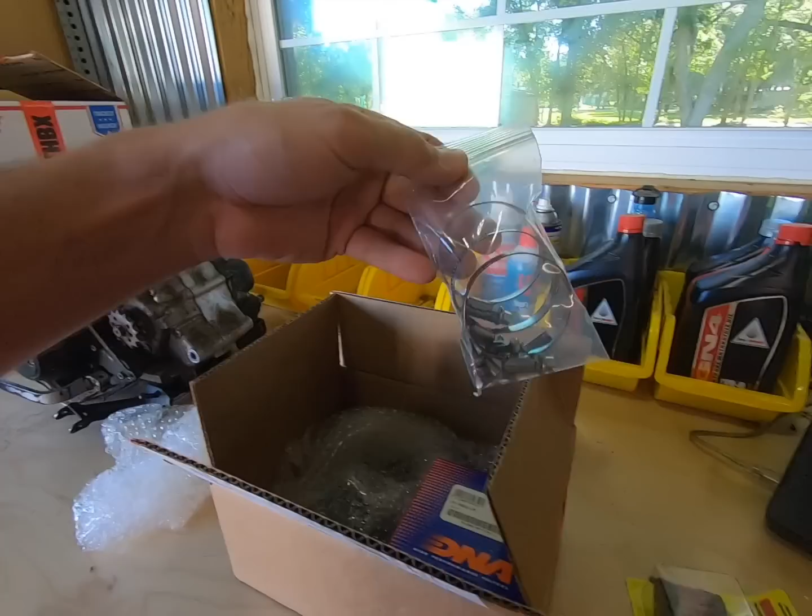It's the new intake system for the Honda Monkey. This is a pre-production piece for MNNTHBX. I know they're for sale on the website, but I don't think customers are receiving them yet, so I received this one a little bit early. I'm not going to focus too much on the unboxing because it might not be indicative of what everybody else gets, so don't focus too much on this. But as usual, nicely packaged box. We have some clamps, the breather filter, and I went with the DNA option for the filter. This is the part you'll probably see the most, but we won't focus on showing you that right now because it'll be on the bike.

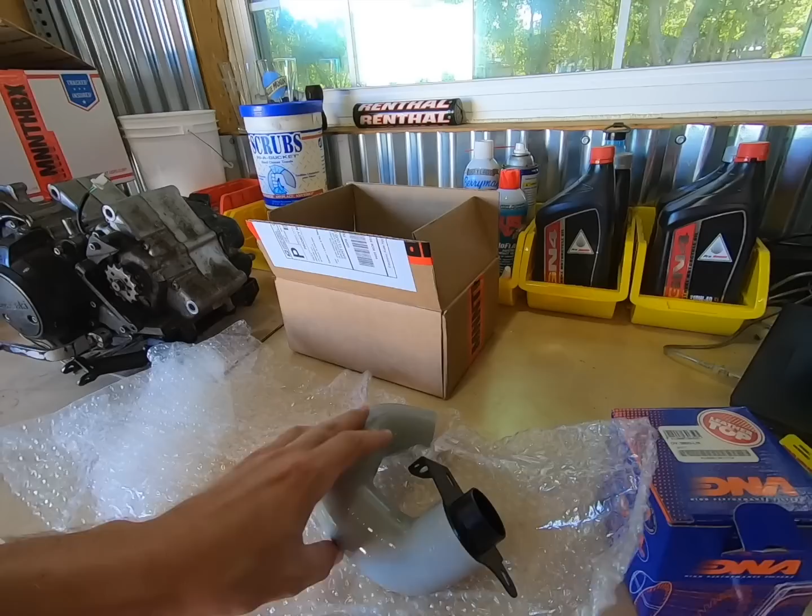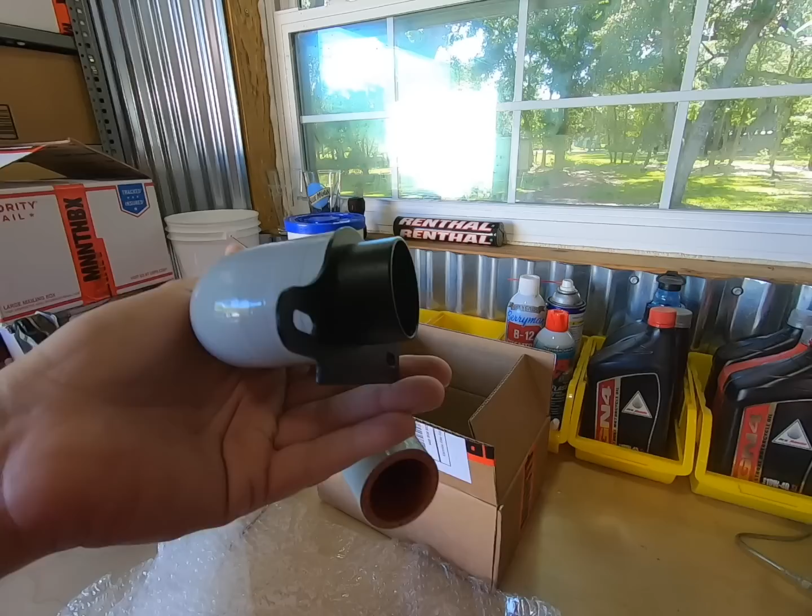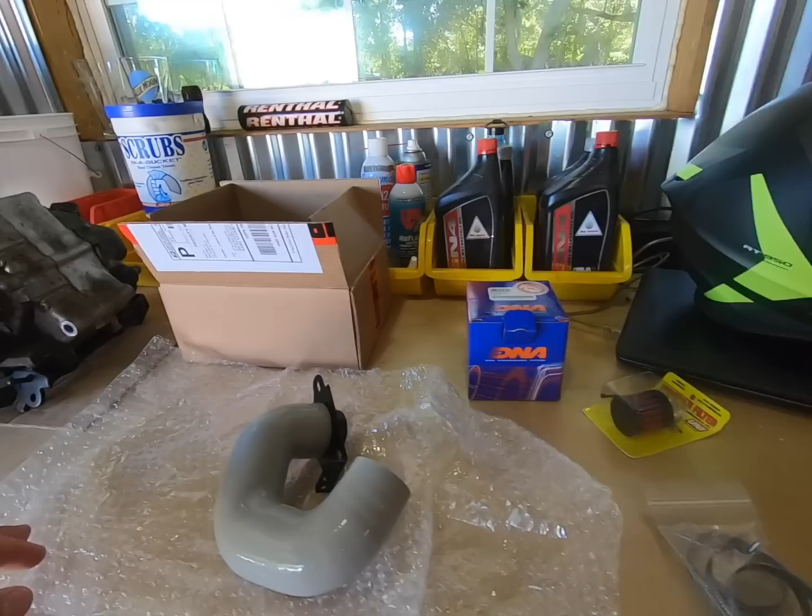And of course the actual intake itself here, which is custom made or specifically designed for the Monkey. It's a silicone intake system, looks like at least an inch and a half maybe size tube, and there's the mounting bracket already hooked into the intake, so this does not look too difficult. But I will go over the factory manual instructions on how to remove the intake just so we have the actual official method of taking that off, and hopefully that'll help you guys along the way installing your intake. So let's get to it.

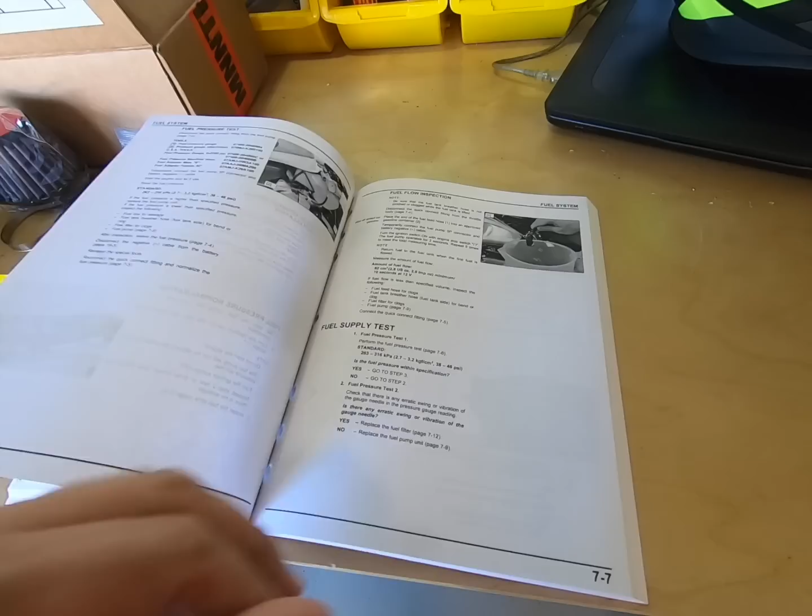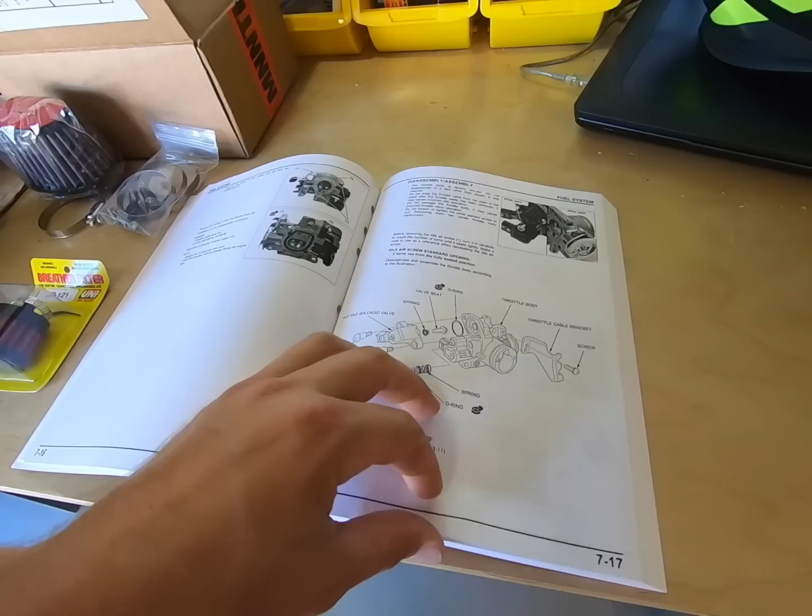So I invested in the Honda service manual for the Monkey bike. My thoughts were, I can figure stuff out, but I didn't know the torque values on a lot of things. Reading through this manual, there's a lot of info you probably wouldn't have known about. One of the things I learned with the Grom was that there's an air screw on these air intakes, and it's not a carburetor, but it kind of works like it in the throttle body. So there's some interesting little facts and stuff in here that you could definitely benefit from and at least feel more comfortable about when working on your bike.

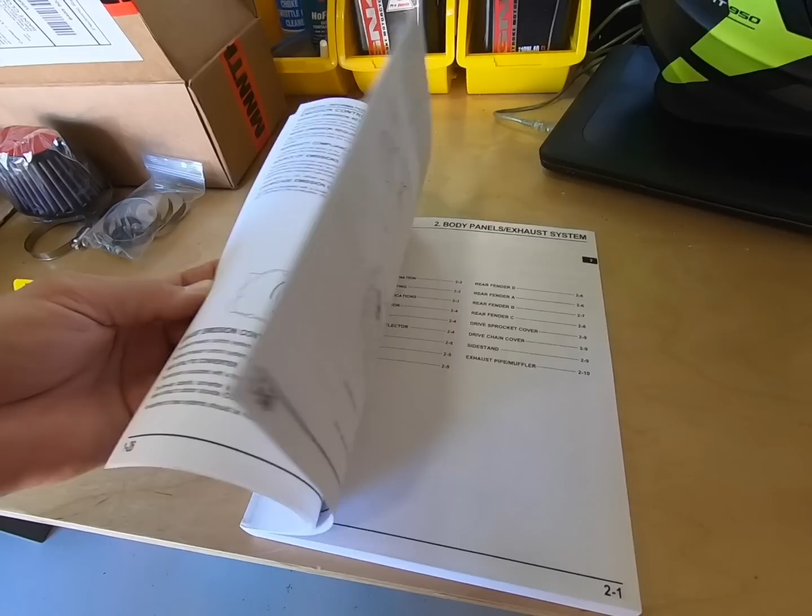So I invested in this, and what I'll be doing, hopefully it helps out, is going through what the factory says you should do as far as these processes. Whether I do it that way or find an easier way, we'll just go about it when we get to that. So the first step in this process is the air cleaner housing removal and installation.

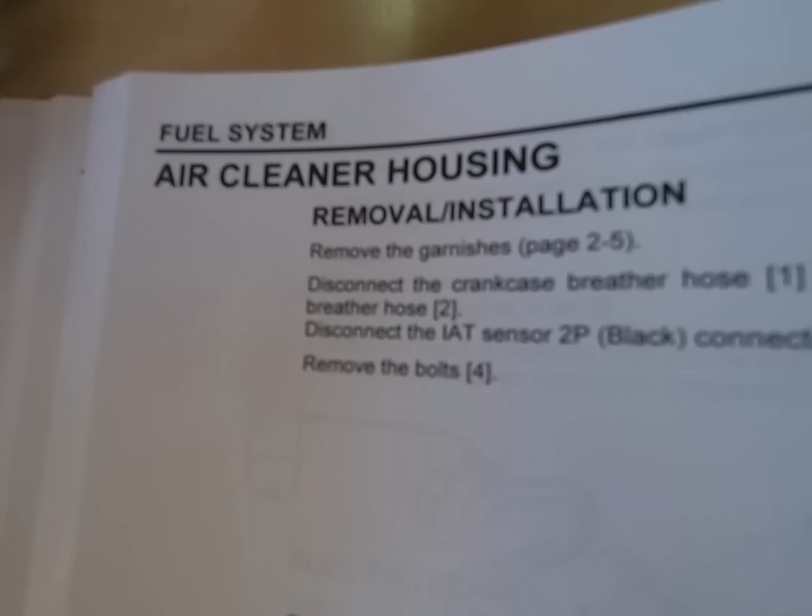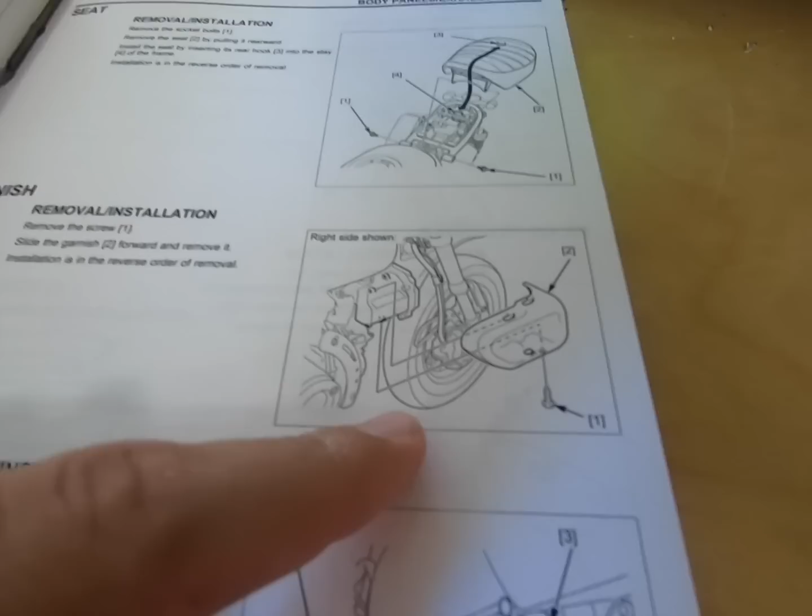Remove the garnishes. I don't see any parsley or anything on this bike. It's kind of funny that they said garnishes. So what they consider a garnish is that black housing surrounding the air filter assembly. It says remove the screw, looks like there's a screw on the bottom, slide the garnish forward and remove it. Installation is reverse, but we're not putting that back on. So, screw on the bottom, slide it forward.

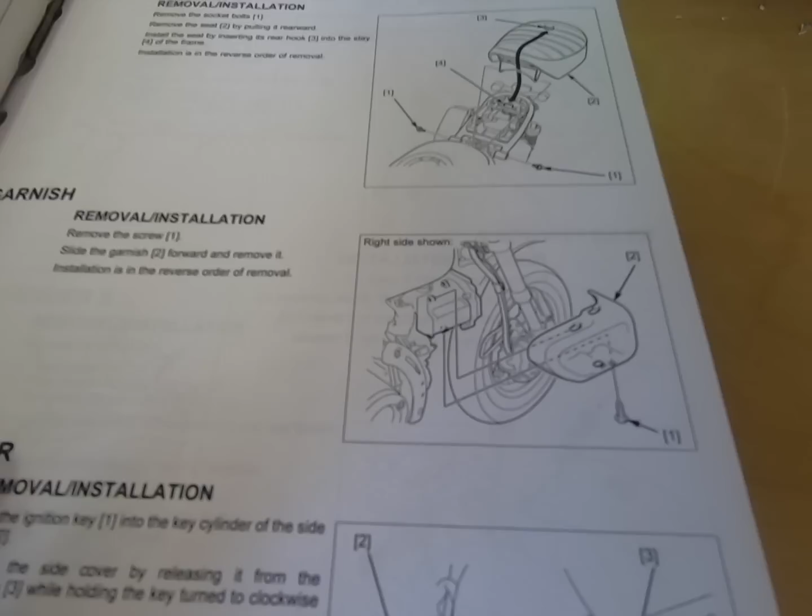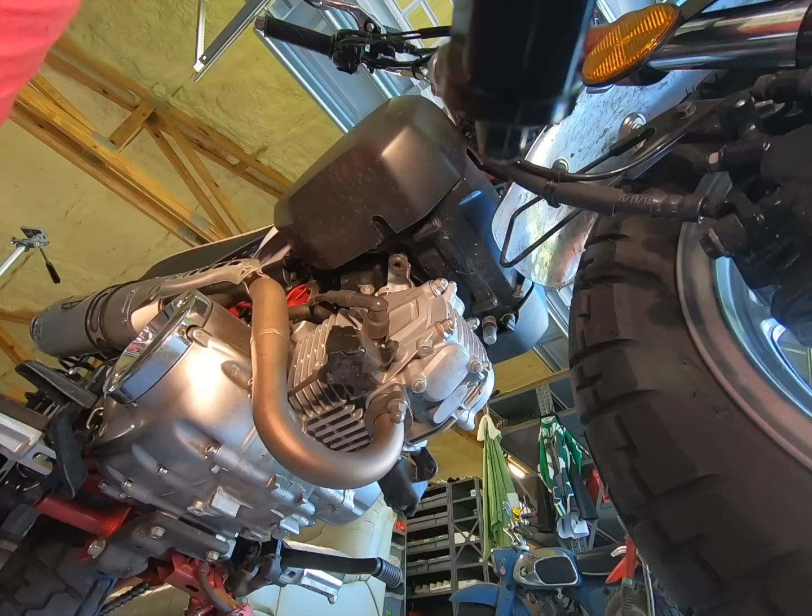Let's do it, let's find these screws underneath the airbox. Garnishes - I would probably have said shroud or something. There's one on each side. I guess garnishes make sense because you garnish a dish with something unnecessary, and to me this whole box is pretty gratuitous. So we slide this forward - there they go. I'll do the other side, and then from there we'll see what the directions say.

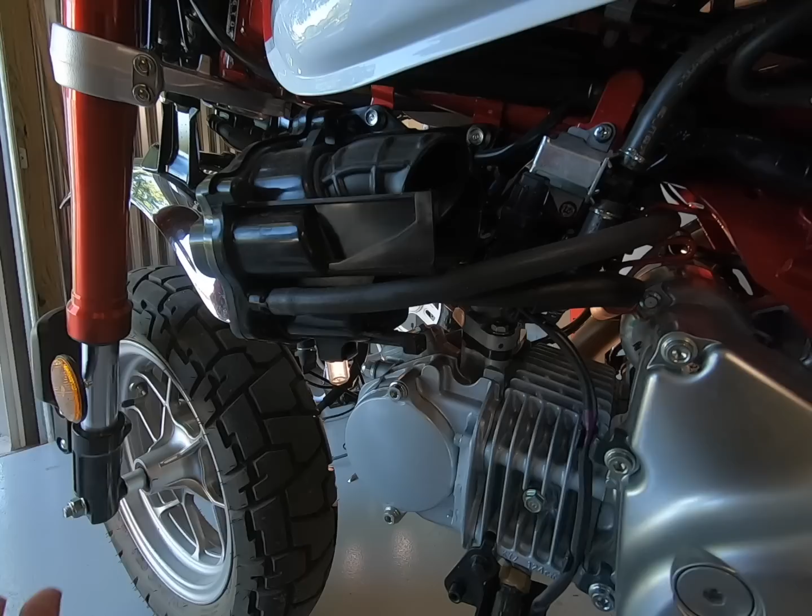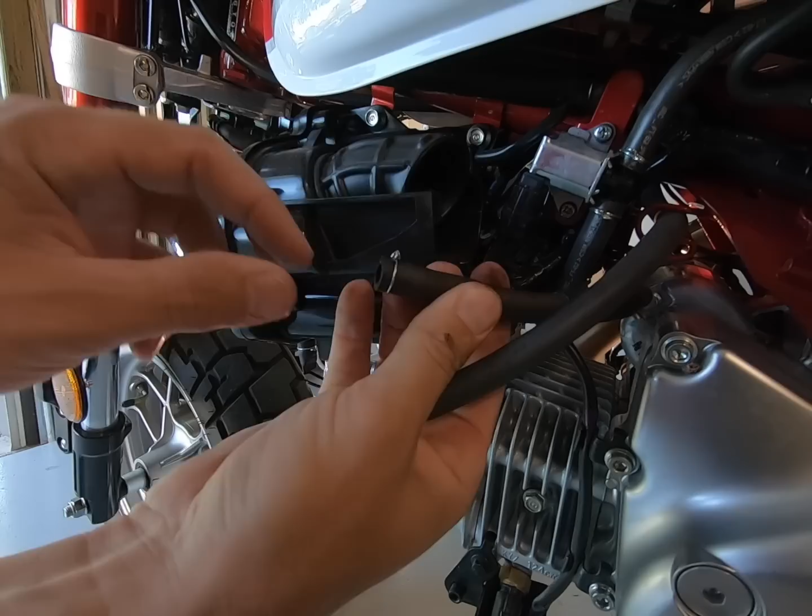Next up on the list, disconnect crankcase breather hose 1 and fuel breather hose 2. Fuel breather hose right there. So here we have the crankcase breather tube, and on the bottom here there's a little - what is that thing called - a little spring clamp that's on there, but the springs were facing the other way. It just pulls off anyways.

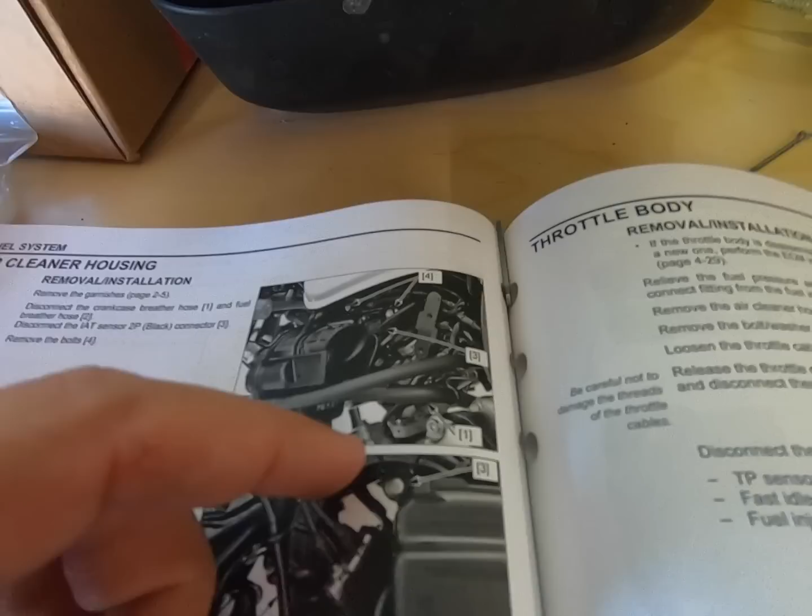Next step, disconnect the IAT sensor 2P black connector 3. So connector 3 right there. The IAT sensor, which is intake air temp, is kind of tucked in here underneath the gas tank, so it's a little bit hard to see. That looks like the connector with the 2 prongs and the gray insert.

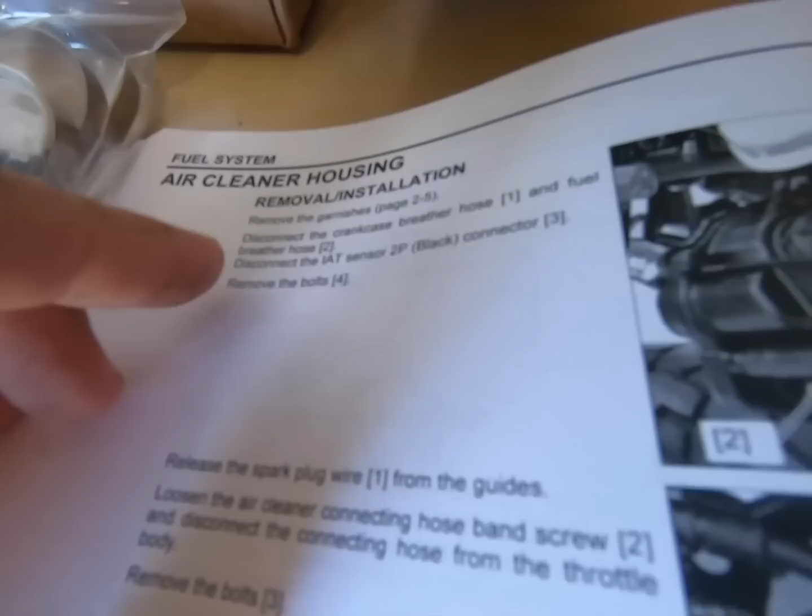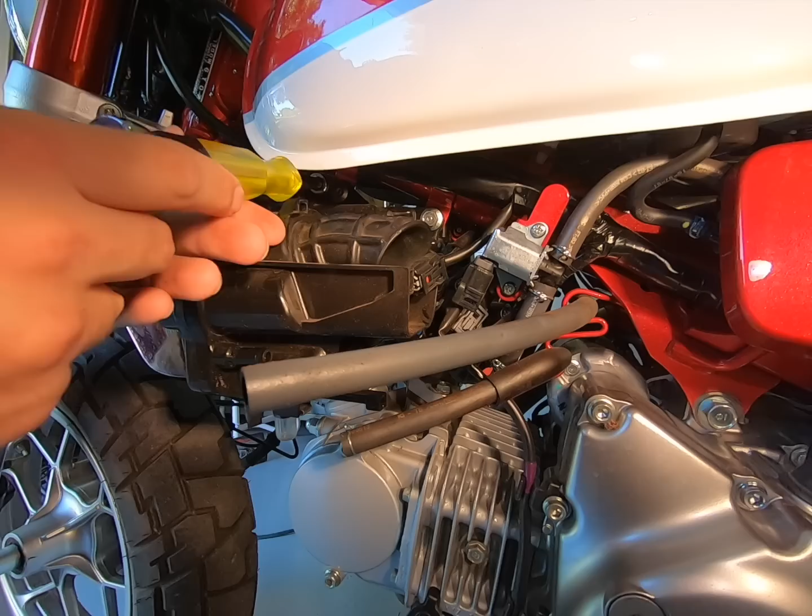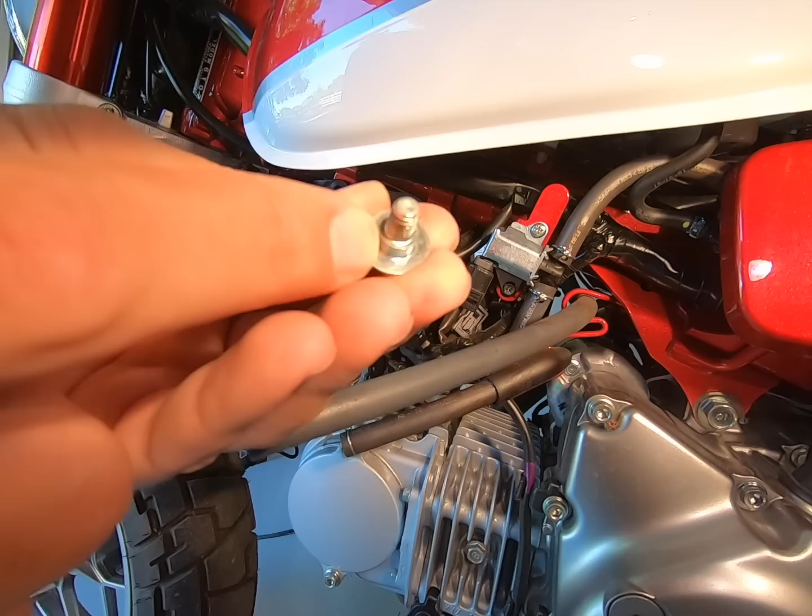Next step in the process, remove the bolts - looks like there's 2 bolts up here, just to the right and above left of where the air intake temp sensor was. So we're gonna take a 10mm and just grab those 2 bolts. These are special bolts too, so don't lose them because they have like a little flat shoulder standoff on them - just not your ordinary 10mm flange bolt.

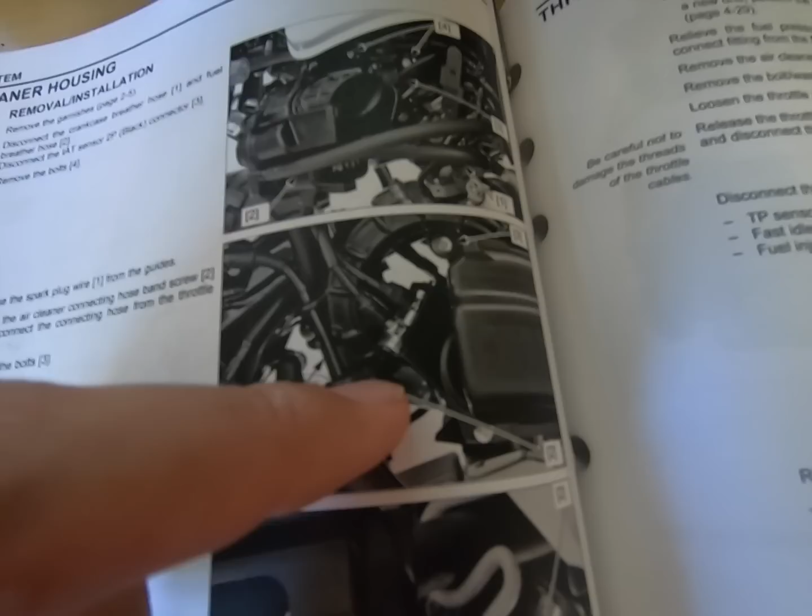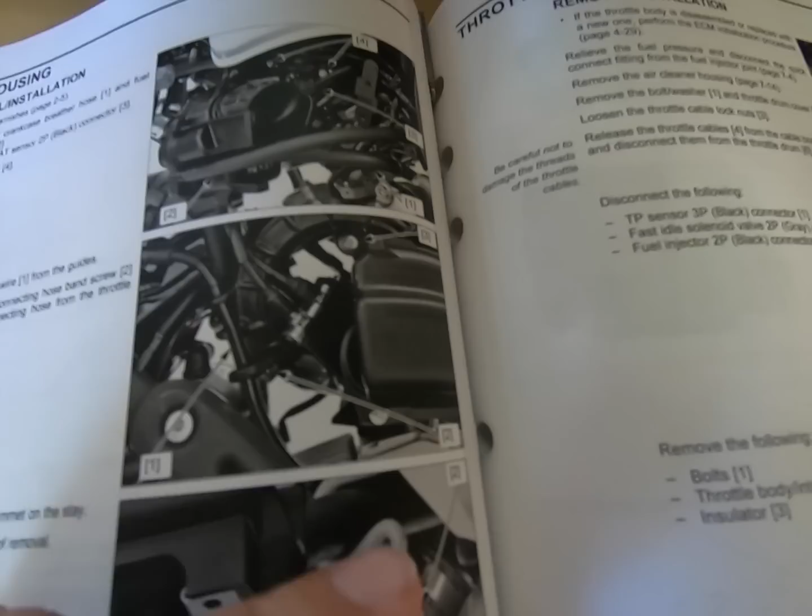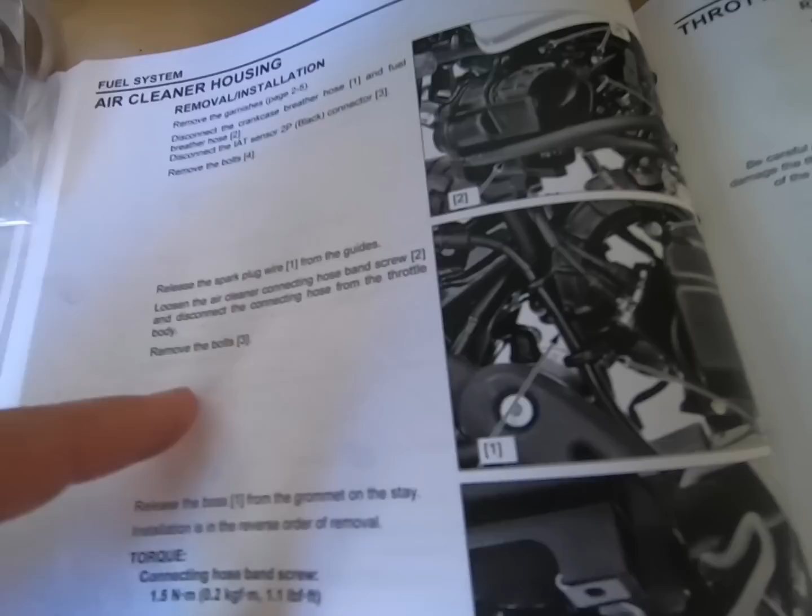Next stage of the process is to release the spark plug wire from the guides. You see the spark plug wire has some guides connected to the air filler, or the air cleaner intake hose. And then I'm going to combine it with the next one: loosen the air cleaner connecting hose band screw 2, which is right there underneath, and disconnect the connecting hose from the throttle body. So this whole process is going to remove the intake hose from the throttle body. And then the last one, remove the bolts - looks like there's another 10mm bolt up there.

Spark plug wire from the guides, it's molded in with little hooks there, pretty cool. And then underneath that, there's a Phillips head for the band clamp. That's in there pretty good, so make sure you have the right size screwdriver for that.

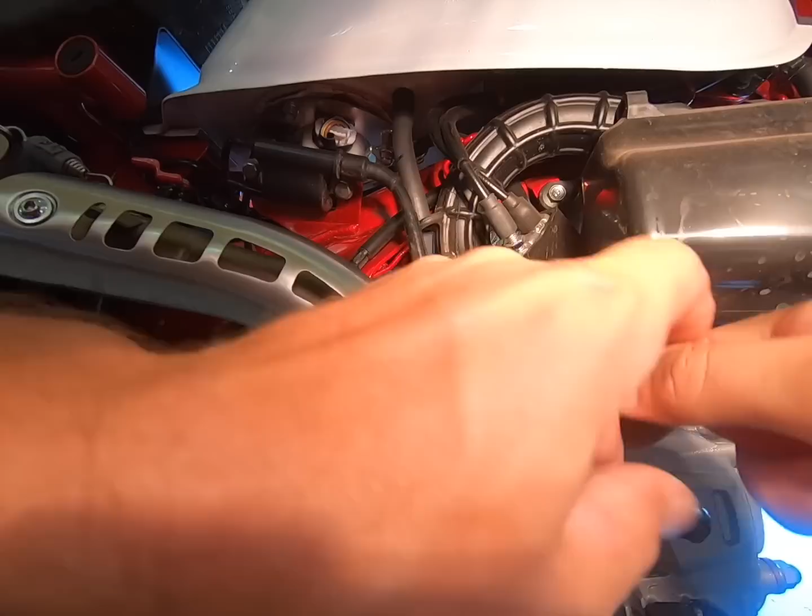So I got a sharper bladed screwdriver, broke it loose. That's in there pretty good, but it's just a band clamp so you don't need to take it all the way out. Then disconnect the hose from the throttle body. It's on there a little tight because it's rubber and probably never been taken off.

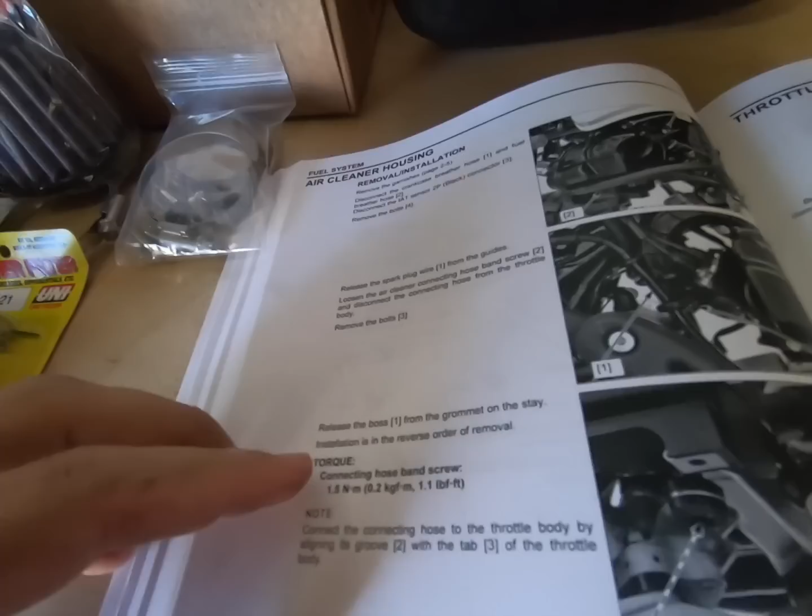Then you have the 10mm bolt underneath here. Once again, another special shoulder bolt, so don't lose that. Next stage of the process, release the boss. Looks like there's a rubber grommet boss from the grommet on the stay.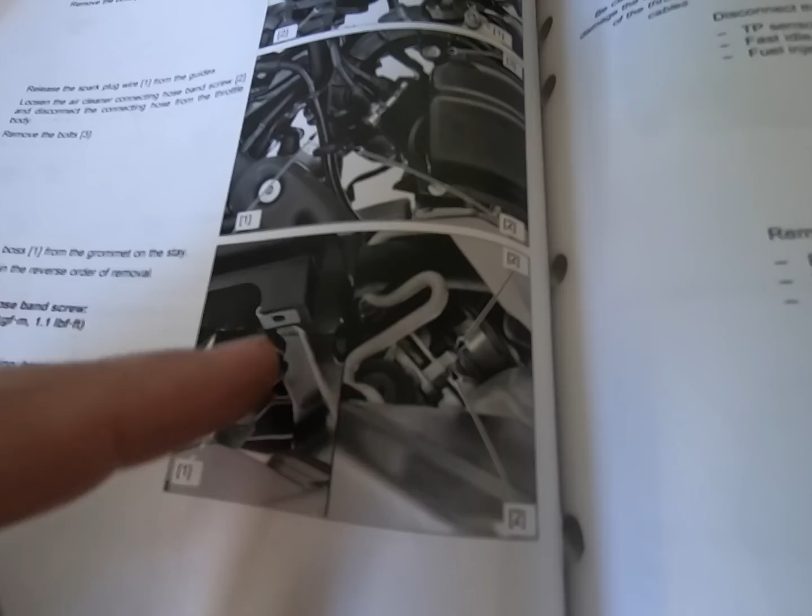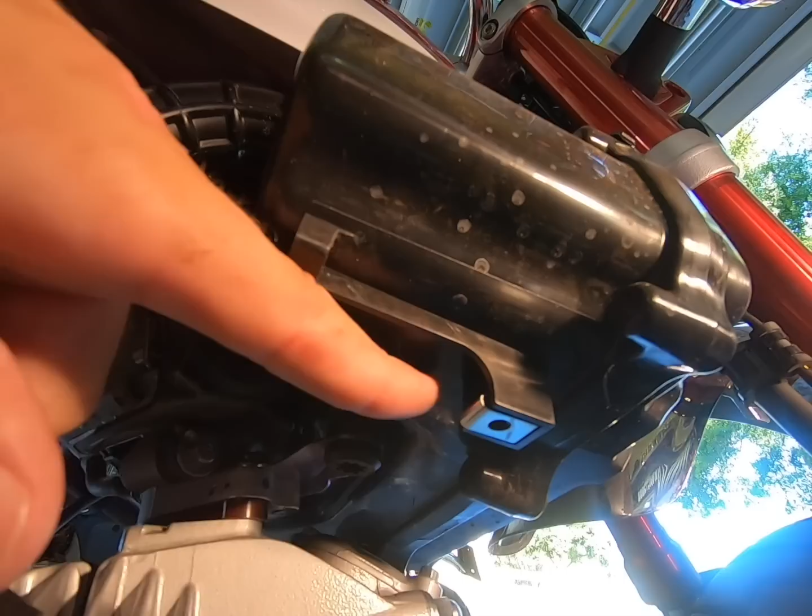Looks like we're going to pull down the whole airbox there, and the next installation is the reverse, so this is our last step. It's a little hard to see, but the rubber grommet they're talking about is right here, and all it is, is a mount to hold this big airbox assembly up. So we're just going to pull it up from that, and it should loosen the whole assembly.

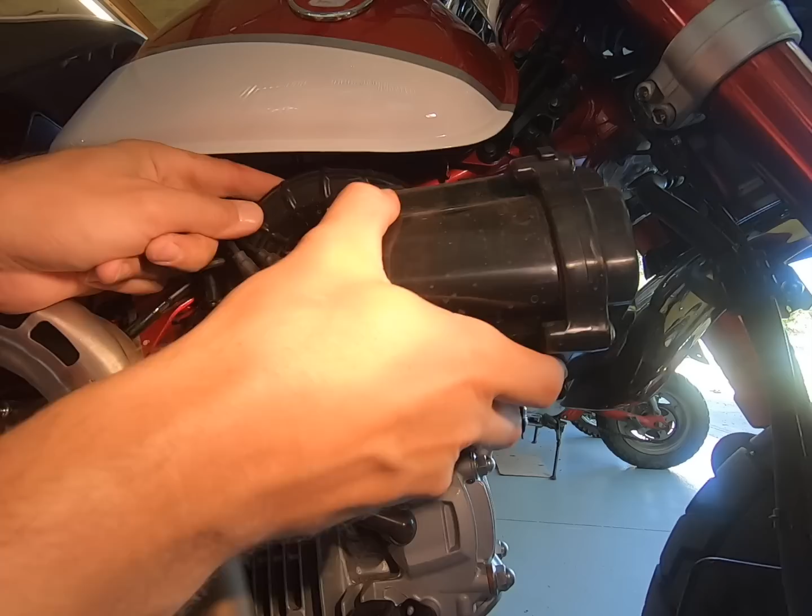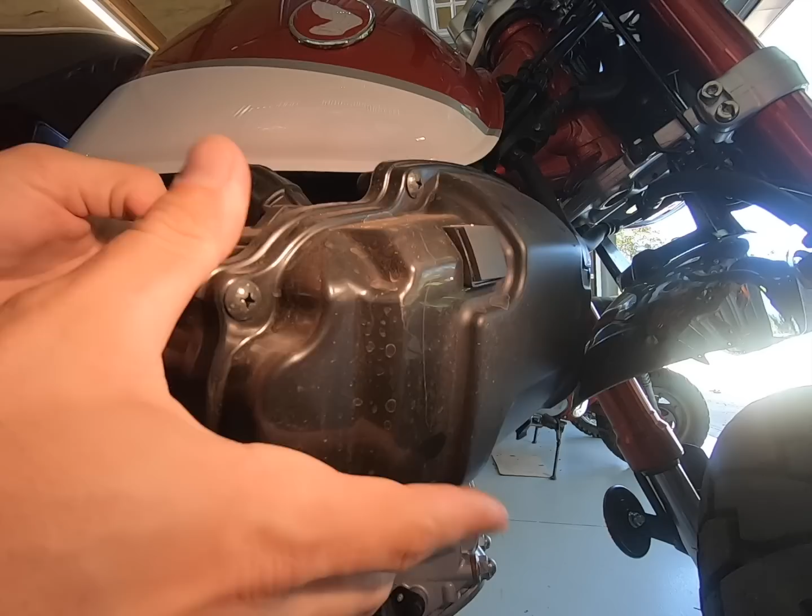So we got it loose, it pops up, and the next challenge is probably just going to be getting the box out of the way. Turn the wheel here, get the fender out of the way, kind of twist it out of there. Box is loose, just finagle the air intake pipe out.

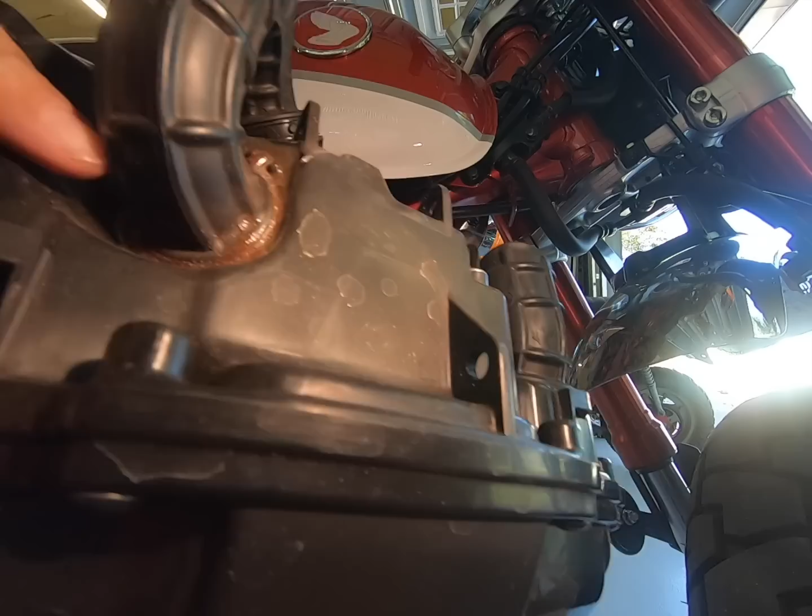It's loose, there it goes. Don't try to pull the pipe from the box because it's sealed in there with some sort of glue, you'll break it. And here we go.

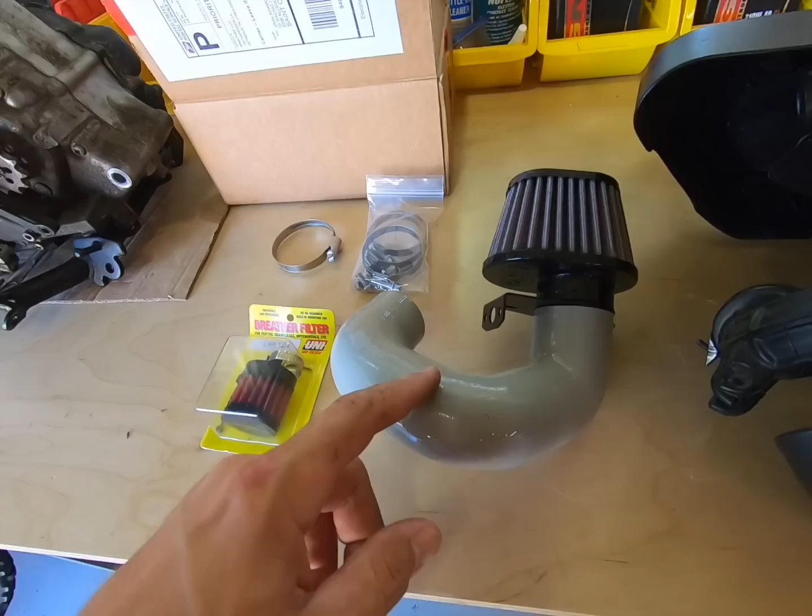Now that we got the monstrosity off of there, we're going to take a look at what we had on there and what we're going to put on there. This thing is just massive, it's a unit. Obviously you saw it on the bike and it's the first thing you see about the bike, and you're like, what in the world's going on with that?

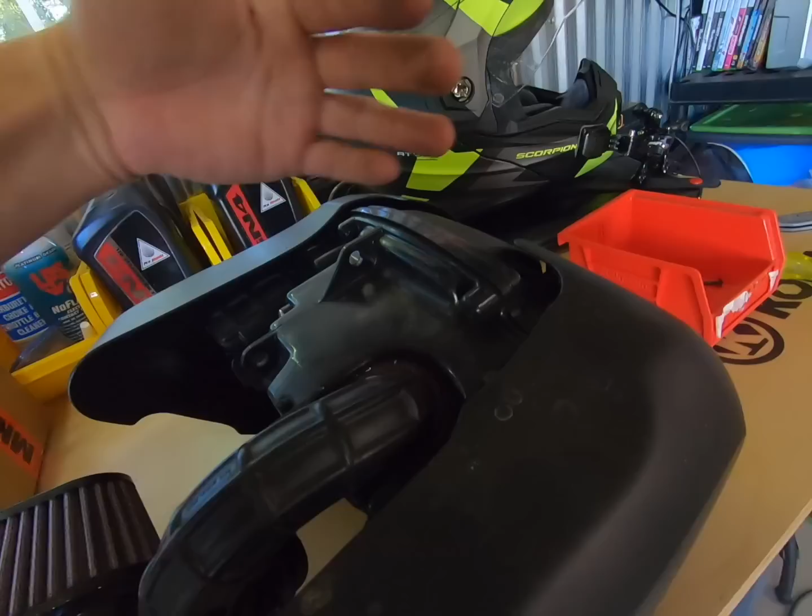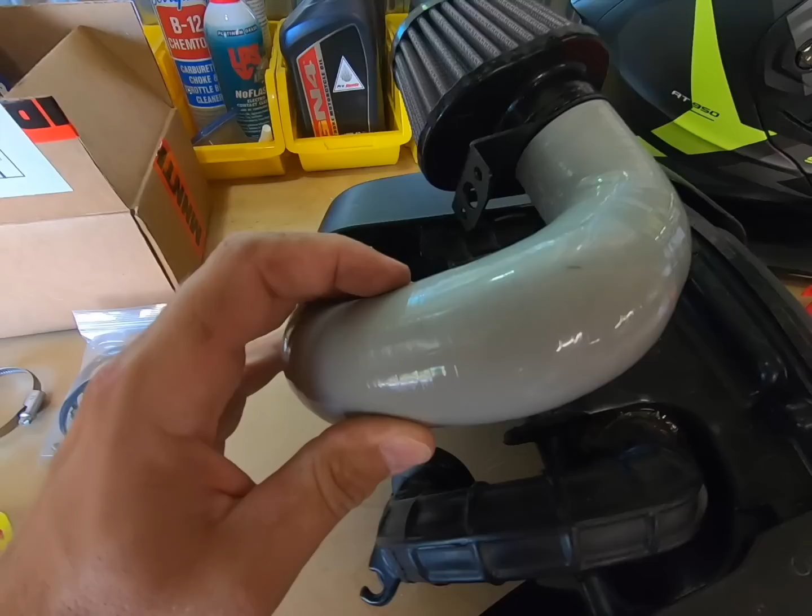This is Honda's way of making sure this bike gets clean air all the time no matter what you're doing with it. The air goes in here, into a box, through a panel filter, comes up through this intake tube back into the throttle body. This new one does the same thing but with a more freer flowing filter, less restriction, and a bigger intake pipe. So if you look at the comparison here, you're breathing through a snorkel with that, and here you're breathing through basically several times bigger pipe.

So clearly you're going to get more air, and that's the goal of this system. Also, just how it cleans up the look of the bike, there's no doubt this is going to make the whole thing look a lot better than this. Two facets of this: more air, more power, less bulk. Three facets. So let's get this thing on and check it out.

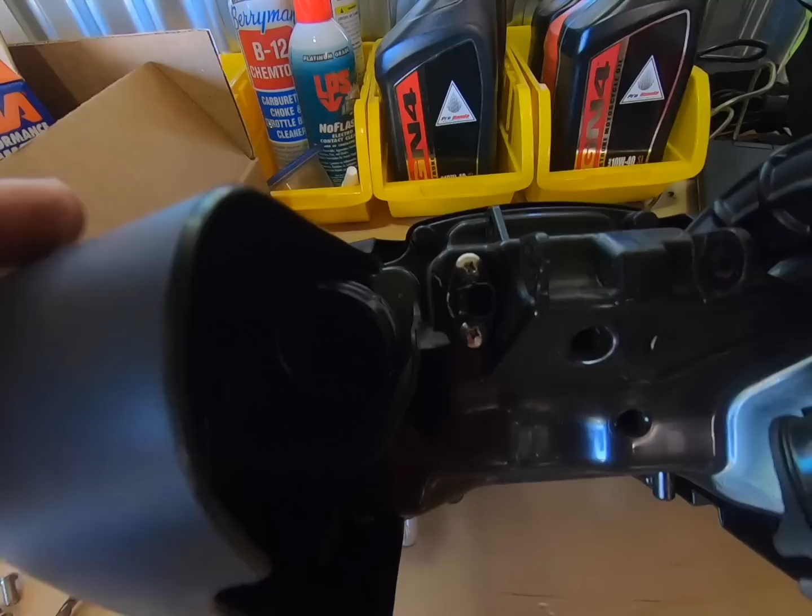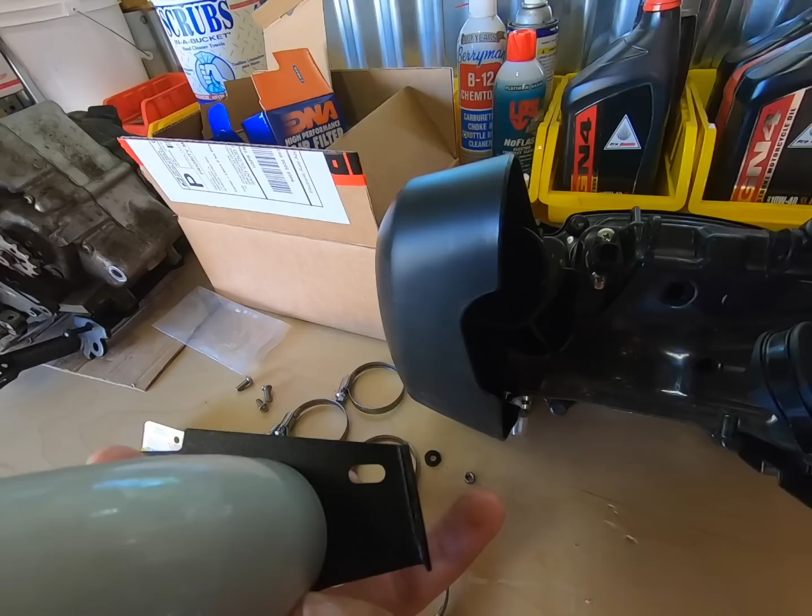One step of this process you might forget about is you're going to have to change the air intake sensor from being originally in the box to this mount right over here. So don't forget to remove the air intake temp sensor, IAT sensor, from your original box, and then go ahead and mount it on the bracket. It's going from internally mounted to externally mounted, but the goal is the same: to read the ambient air temperature coming into the motor.

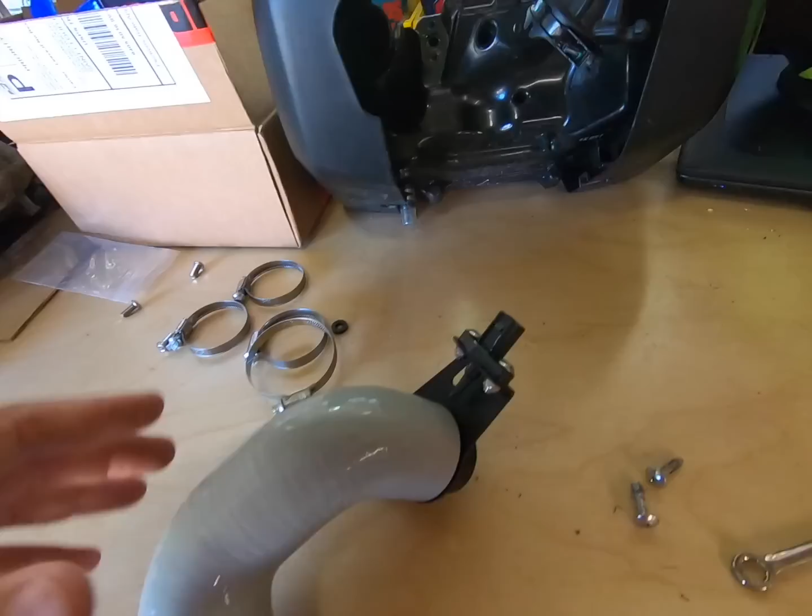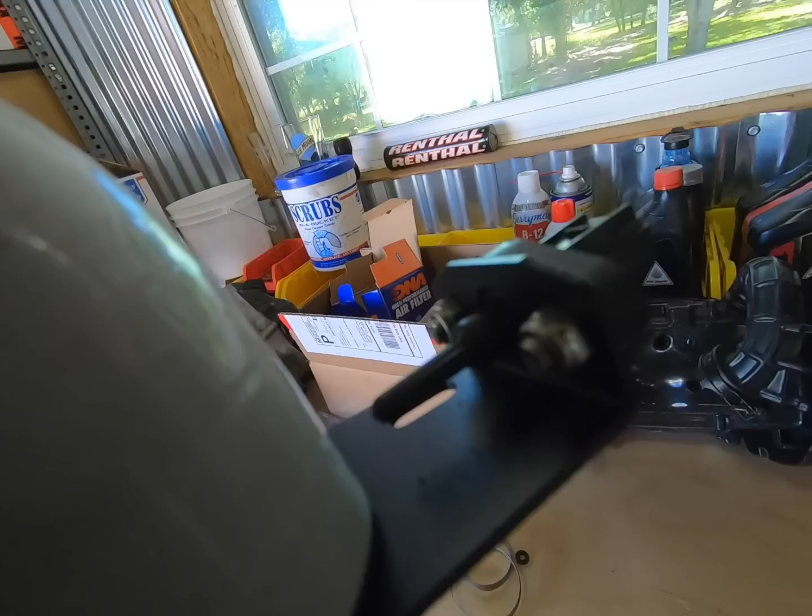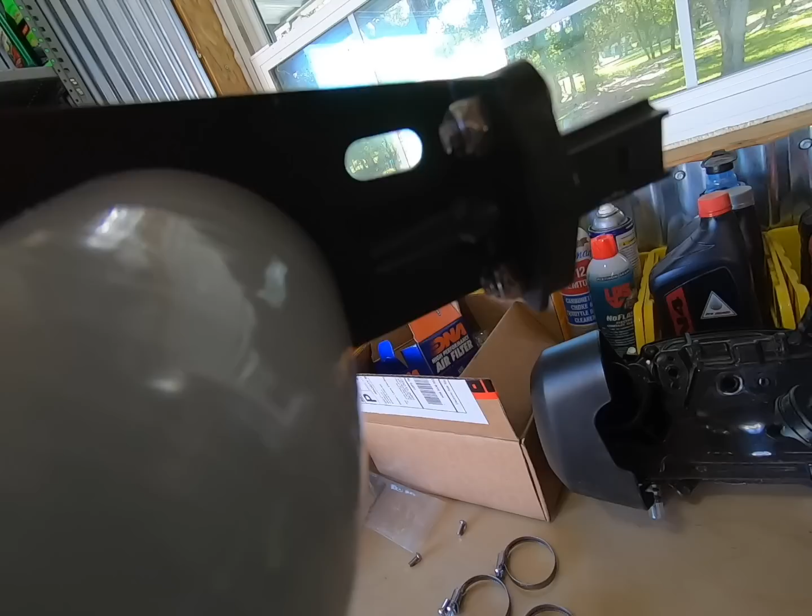Alright, so we mounted the IAT sensor onto the new intake, and it just externally mounts there, hidden away and tucked away neatly. First thing I thought when I did this with cars was, how am I going to externally mount a sensor? Well, these air intake temp sensors don't have any sort of exposed elements to them, it's like a solid sealed plastic. I honestly don't know how they read the temperature, but nothing's exposed to the elements that's going to damage the sensor. This is pretty common and not something you need to worry about.

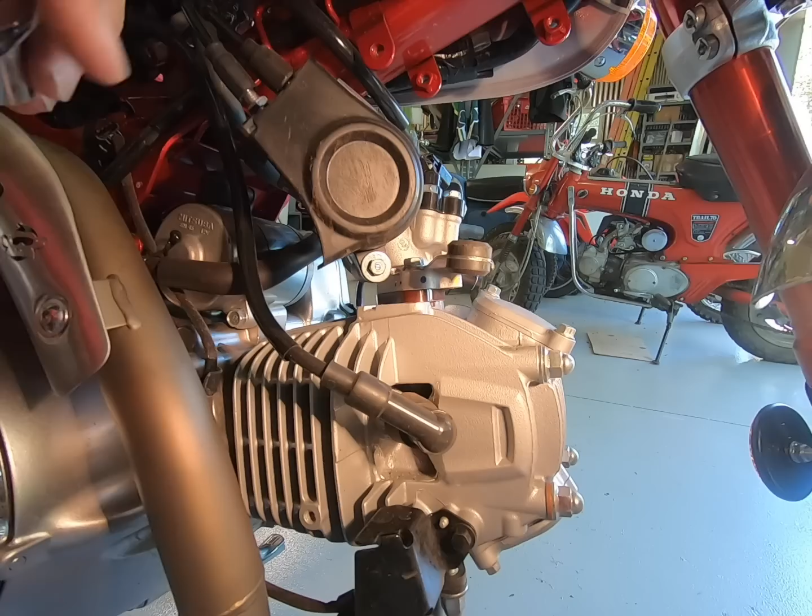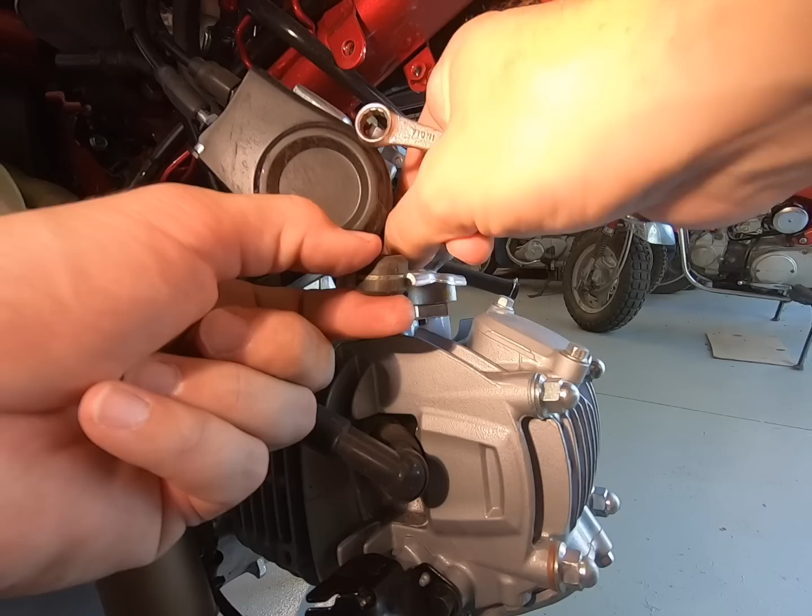So the original airbox has a mount here, and I'm going to go ahead and remove this because it's not needed anymore with the filter, and that's just two 10mm bolts. But be sure to put the bolt on the left side here back in, because that is part of the bolt that holds down the throttle body to the cylinder head. It's a pretty long bolt that goes onto that one side, so you can't really mix that up. It's a little difficult to get out too, looks like the plastic's kind of in the way for the throttle body cover.

Put it back in, tighten it all back down, and rock and roll.

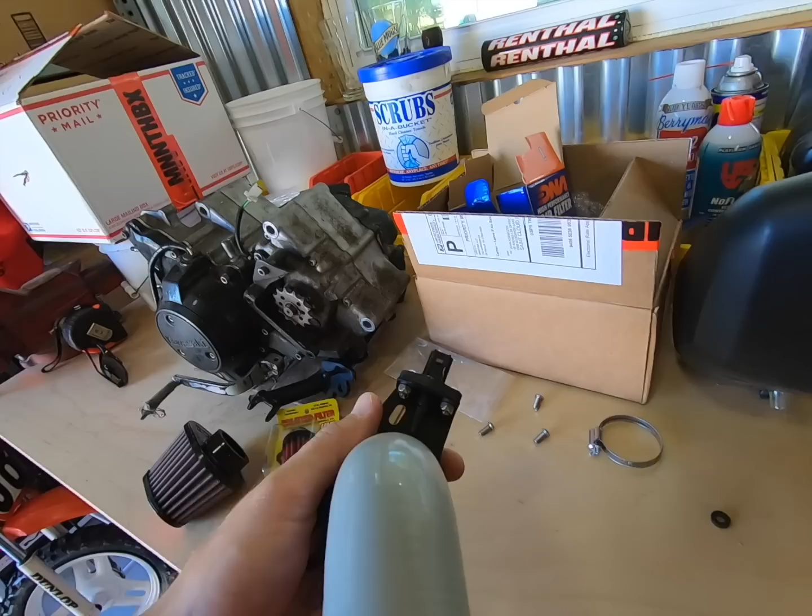My plan of attack for putting in the intake is to not try to do it all in one piece, because you're just going to have to snake it all through there. So I'm going to disconnect the mount for the air filter, and then first attach it to the throttle body, and then go from there. You really want to make sure that your band clamp is oriented correctly so you have easy access to that bolt to tighten it, and then just snake it in from there.

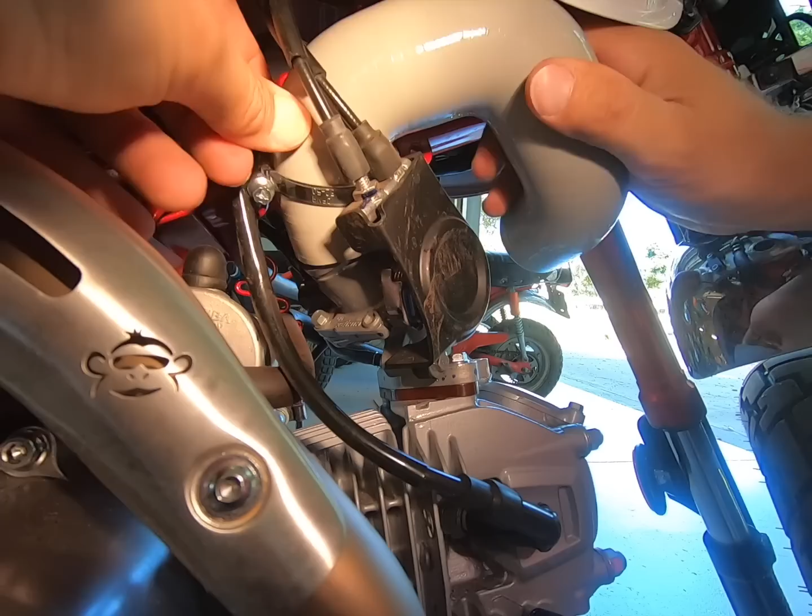Right down on top of the throttle body inlet. It's a little tricky to get it all lined up and make sure it's on there correctly, but it's just a matter of working the silicone intake hose where it needs to go.

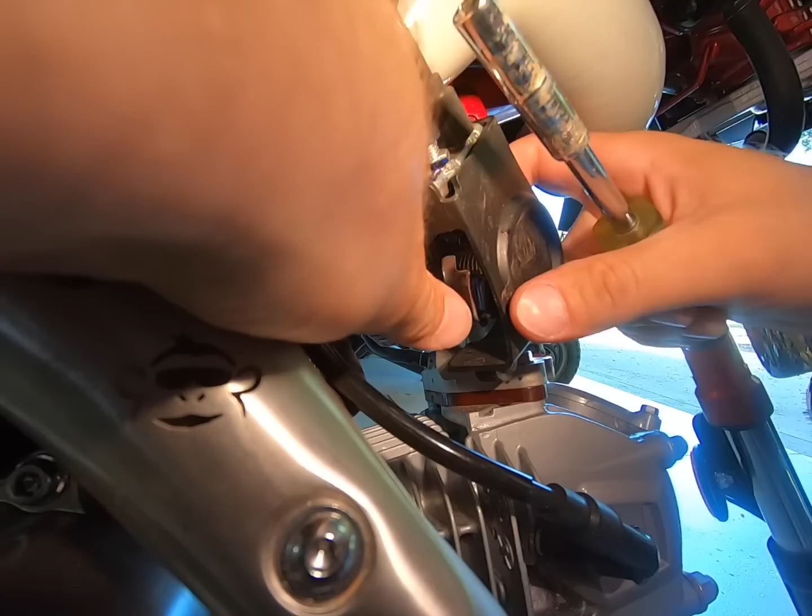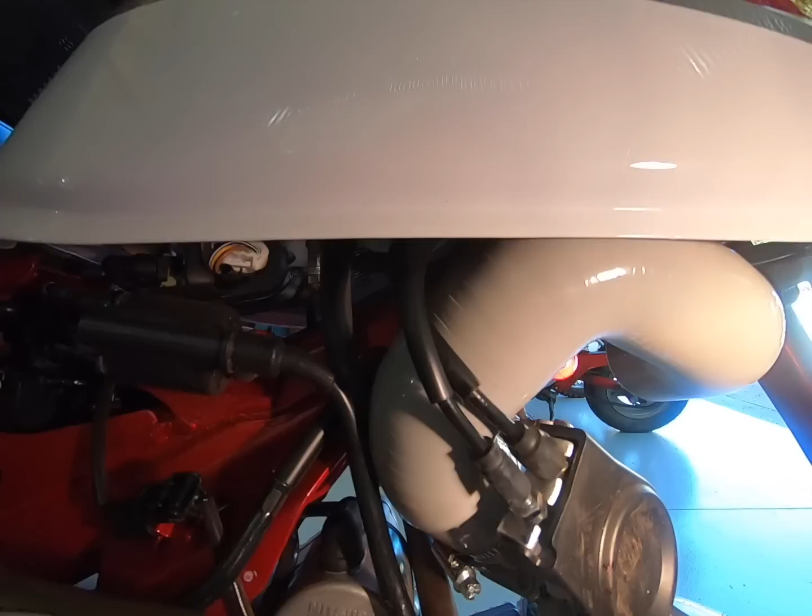Once you get it on to where it should be, grab your 9/32 socket or a Phillips head. I always try to use the socket just to make sure I get some good clamping force on this here. This intake tucks up nicely under the tank, and way less space consuming than the stock intake so far.

So we're going to now install the air filter mount. It's a nice little well-engineered piece.

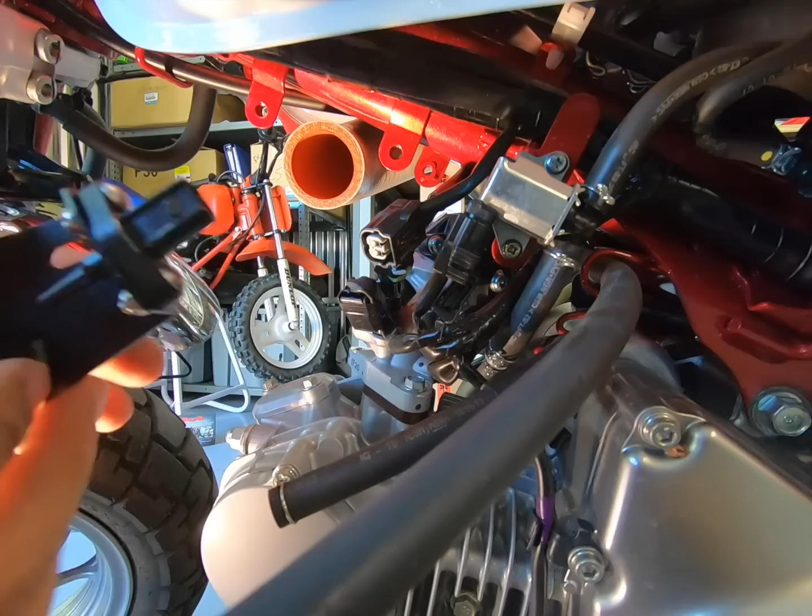So the first thing we're going to do is reattach the IAT sensor. Just goes right there, and this is going to live right here. They included this plastic spacer, and this is going to go on the forward side of that mount, because it looks like the bracket had a little bit of an offset alignment on it from the factory. That's how it was supposed to be.

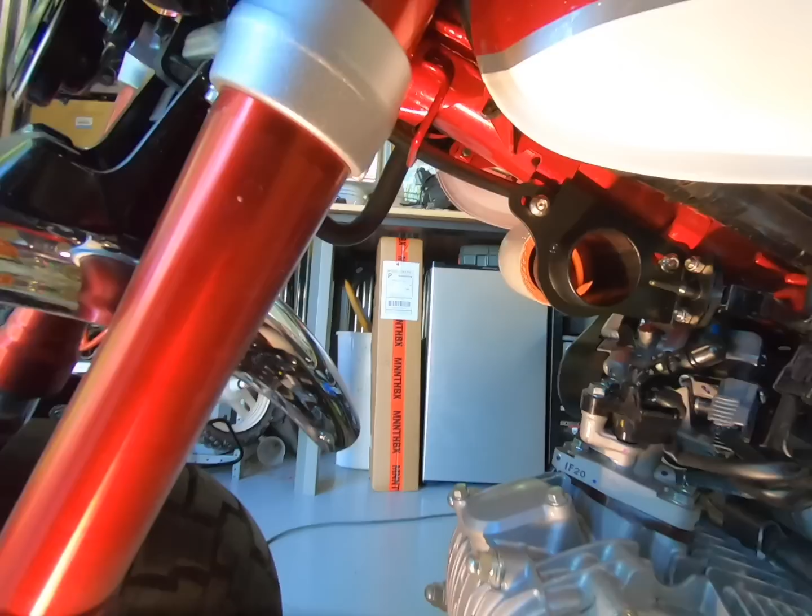So lastly, we're going to want to connect the silicone intake tube to the air intake bracket here, and don't forget, like I did already, to put your band clamp on the silicone for that side too.

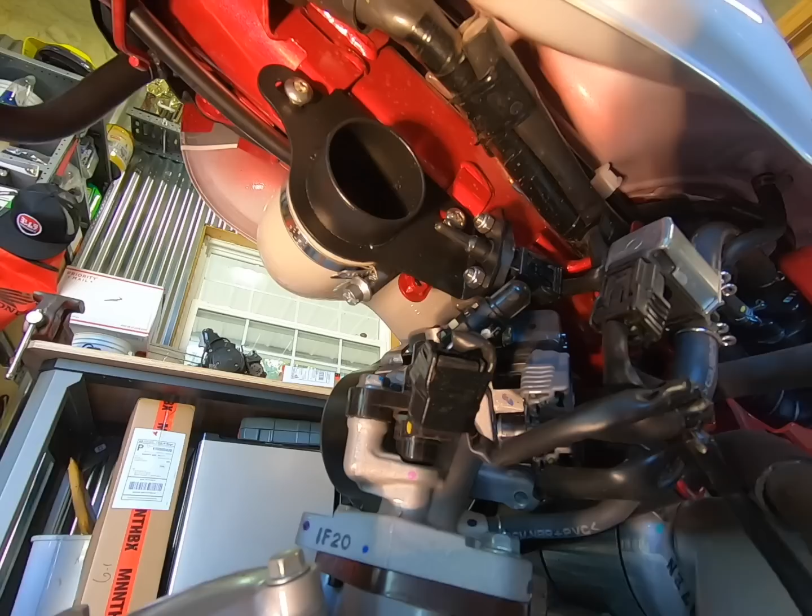Okay, so I got my band clamp up there and tightened up. Make sure you put that bolt into an angle that you can tighten it and loosen it easily, which I had it pointed down towards the front wheel.

Okay, so take your Allen key and tighten the very quality Allen hex bolts that they provide with their kit. This is a nice touch because the stock bolts definitely couldn't be reused because of their flange and shoulder that they have on them. So instead of just throwing in some random 10mm hex heads that are industrial looking, these capped head hexes have a nice finish to them.

Next up, we're gonna put the DNA filter, it's like a K&N type of filter, onto the side of the bracket. And this all fits together very nicely.

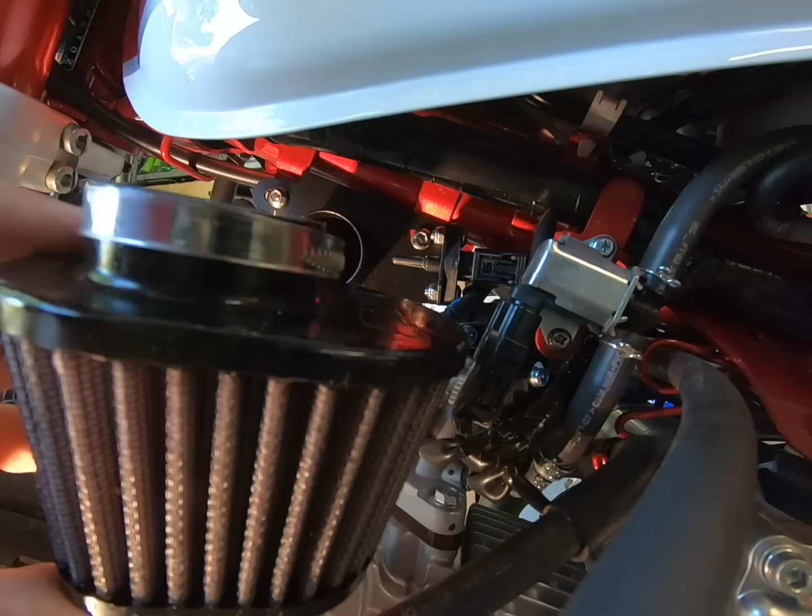It's an offset filter, so the intake is on one side, so I mean you can probably mount it both ways, but I'm sure it's designed to tuck in and hide the air intake temp sensor that's on the back there. So that is the way that I'm going to mount it.

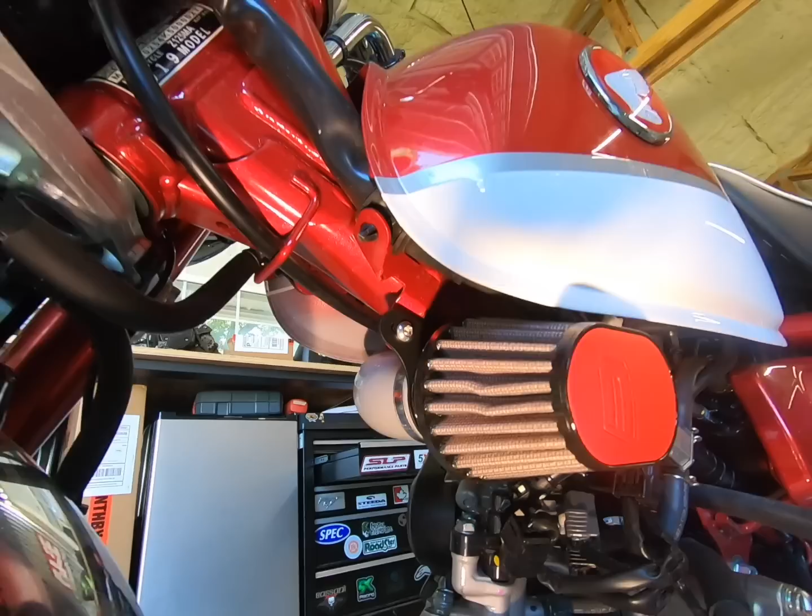So the intake is all in and the filter is mounted. I mounted the filter facing rearward to tuck it all in, and I put the 2 clamp bolts on the bottom so I can get at them later at a decent angle. We'll pan out here and you can see the filter tucks in nicely underneath the tank.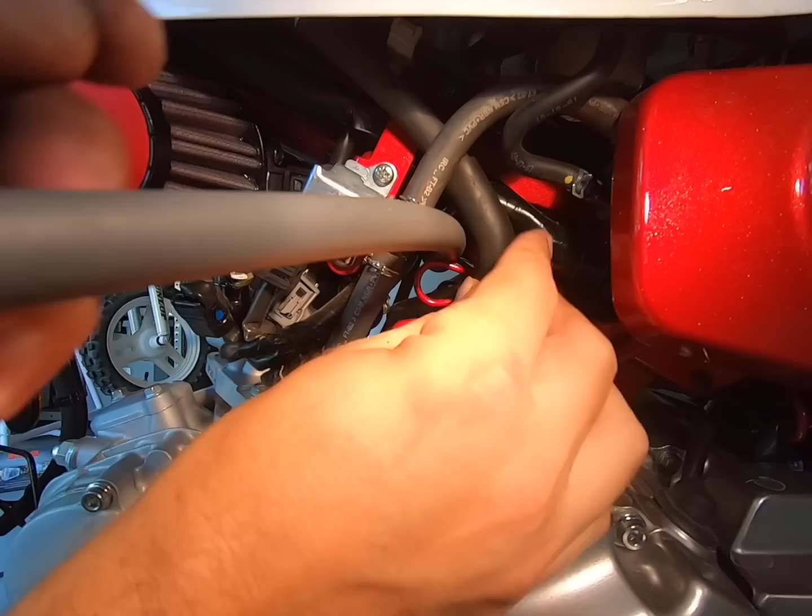And I think our last steps are to just put the breather filter on the crankcase vent. So let's go ahead and do that. So I'm going to take the crankcase breather and then route it behind this other line.

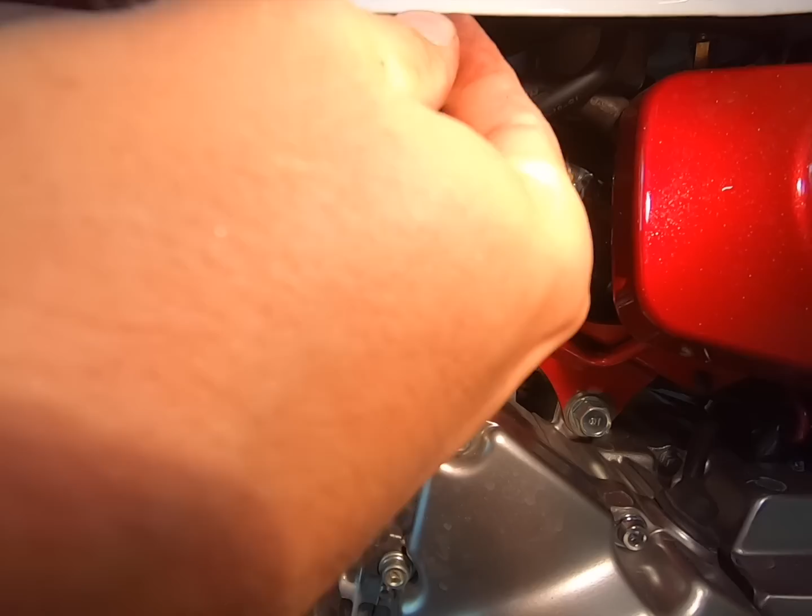Go ahead and find it again. Pop the uni filter onto the hose. Pop the hose onto the uni filter, and then just kind of find a nice spot up in the tank to tuck it away. Might hear it clanking around a bit, but if it's a problem, then I'll find myself a better spot for it. But in the meantime, this is going to be out of the way, and I don't really want to see it, so hopefully this works out.

So for the fuel tank breather, the purpose of this was to just draw fuel vapor away from the gas tank because it's a sealed gas tank. So instead of having like your vented fuel cap like you would on a dirt bike historically with the carburetor, this system's going to work a little bit different. So I'm taking this fuel breather hose and I'm going to slide it behind the other hoses.

And what I want to do is kind of place it so the opening of the hose is sitting near the filter, so it's still going to perform its job per se, to where there's a vacuum in this area where the filter is, and it's going to go ahead and hopefully draw some of those stray vapors out of that system and into the intake where they were originally destined to go. So hopefully that kind of restores the system to its original design, because we don't want to plumb into the intake hose or anything. It's really not necessary, in my opinion.

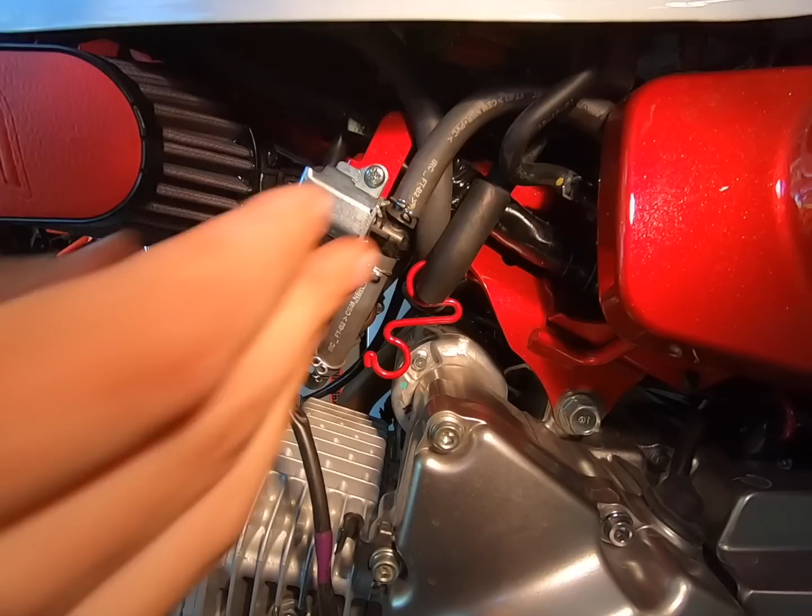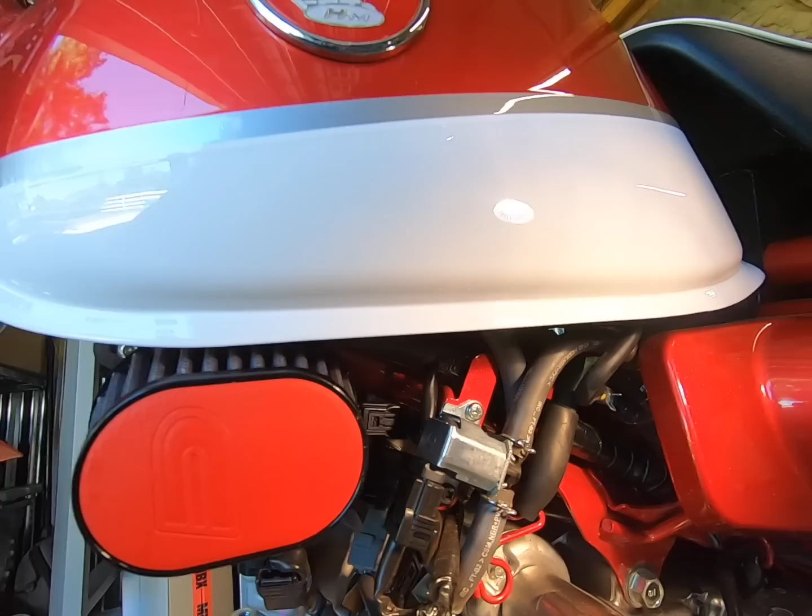So I'm going to go ahead and tuck the crankcase breather back there. And once again, that filter is in Never Never Land up here underneath the tank. Can't even see it. And with that, I'm going to go ahead and call that good. You know, you're not going to get rid of some of these hoses here unless you figure out a different solution. So pretty happy with this setup right now. Let's go ahead and give it a try.